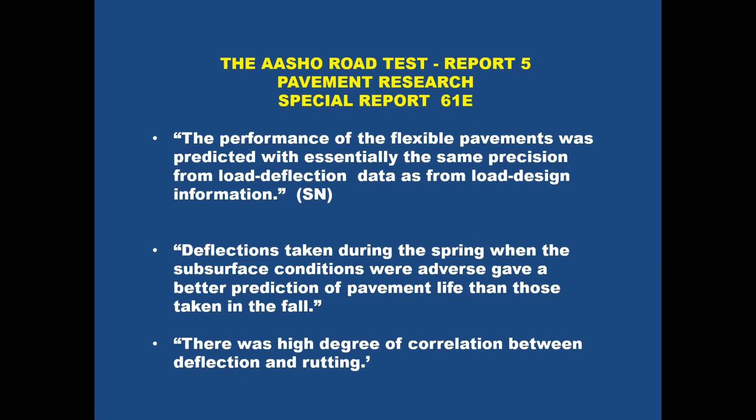Another one showing creep speed deflection versus average rut depth, and as you can see, the R squared was 0.6. It's not the best R squared, but at least it does confirm that there is this relationship.

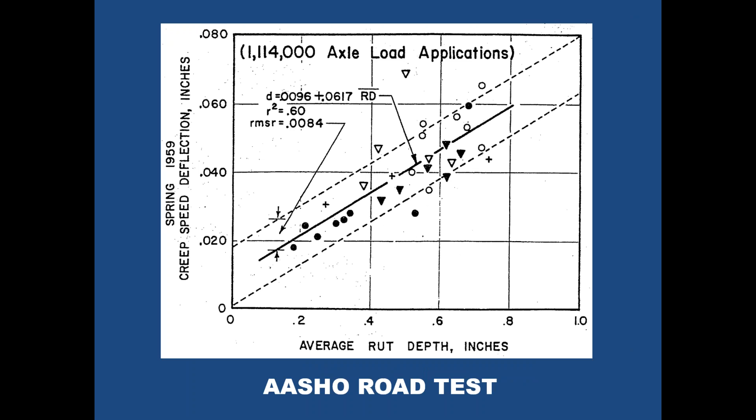Moreland Herrin taught the course. And E.J. and Matt Witczak—most of you would develop a familiarity with Matt through your studies, I'm certain—in 1975 updated that analysis book, The Principles of Pavement Design.

And then the other one, I think, probably has gained a lot of traction over the years: Pavement Analysis and Design by Y.H. Huang, University of Kentucky. His first edition showed up in '93, and he had a revision in 2004.

Some of the early activities in mechanistic empirical design: I would suggest that ME design got kicked off at the first Ann Arbor conference, now known as the International Society of Asphalt Pavements, in 1962.

I attended that meeting, and there was a lot of information at that time coming in from folks in the United Kingdom about ME design, et cetera. So quite a few good articles and papers showed up in the '62 Ann Arbor conference.

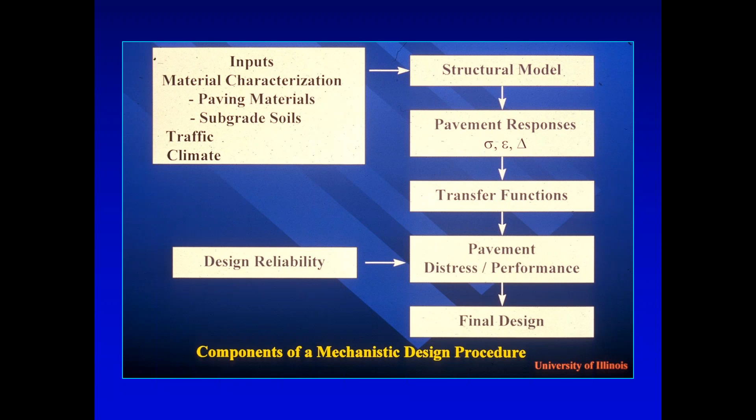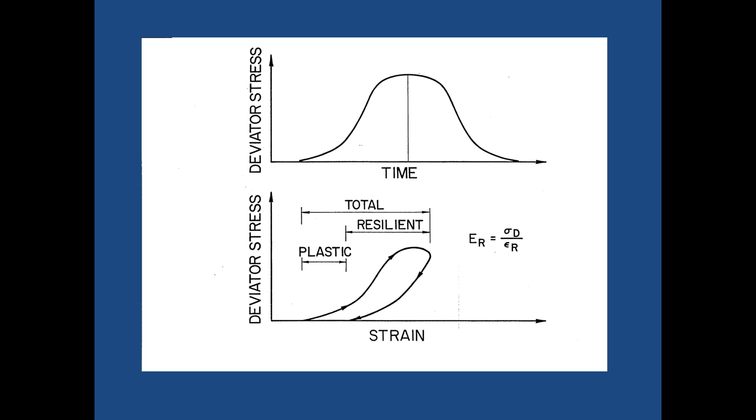If you look at resilient modulus, we have a repeated deviator stress. We measure total strain and recoverable resilient strain, modulus, resilient modulus, repeated deviator divided by the resilient strain. Fine-grained soils are stress softening. The higher the stress state, the lower the modulus. This is a typical one that we developed years ago and used in our work in Illinois for the Illinois DOT, showing the modulus as a function of deviator stress.

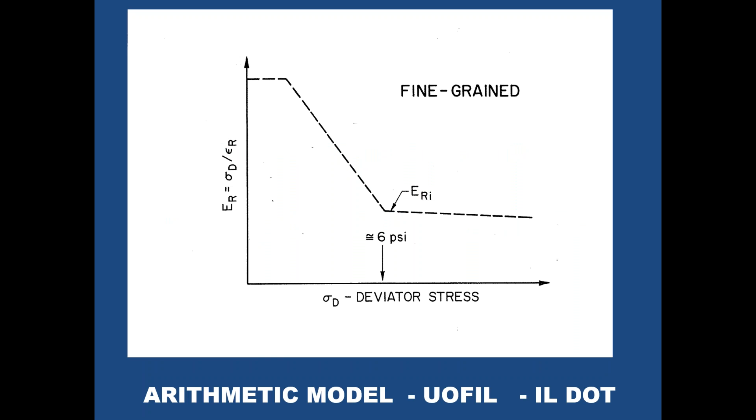Interestingly enough, somewhere around 6 psi, you start finding the effect of stress state drops off considerably. That's not a magic number, but it's a good number. And so beyond 6 psi, you'll find the modulus does not change a whole lot as a function of repeated stress state. In fact, the Asphalt Institute suggests if you're developing an input for their particular approach, pick a modulus based on a repeated deviator of 6 psi.

You can also then look at the effect of various factors such as moisture content. Here we've got a particular soil Ipava that sells for about $14,000 an acre in northwestern Illinois. But at optimum moisture content, a little bit on the dry side, then we're at optimum plus 1.8%, a huge impact. So we have material very sensitive to moisture content.

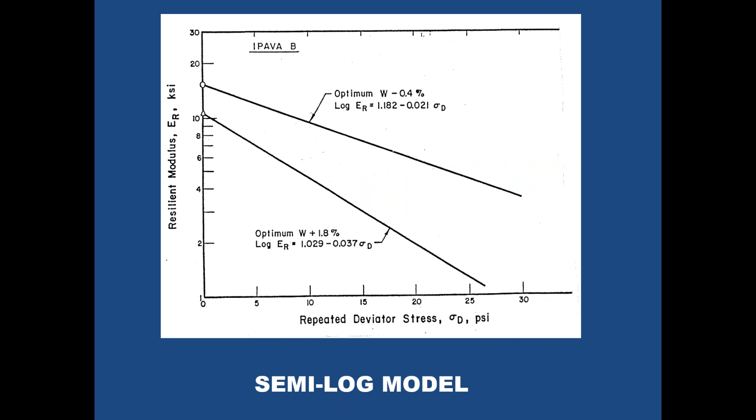There are other ways of representing the stress dependency. For example, the semi-log model is one that's used. We've got that in ILLIPAVE. If you take that same data we showed in the arithmetic plot, show it on this kind of a plot, you'll find once again that you can capture the effect of the stress state on modulus.

The model that's currently employed in the mechanistic empirical design guide is this one. It takes input for theta, the bulk stress, as well as the octahedral shear stress, and from that you can predict the resilient modulus. This particular model has a K2 and a K3, and that kind of complicates things.

Once you get beyond two parameters, I really get concerned as an old farm boy. I like simplified stuff that still captures the major effect. But in the analysis of the LTPP test data from sites all over the country, there was not a very consistent effect of K3. In fact, in some cases, it went the wrong way. So this model is, I would suggest, one that is very sensitive. You need to know from your test data exactly what those values are.

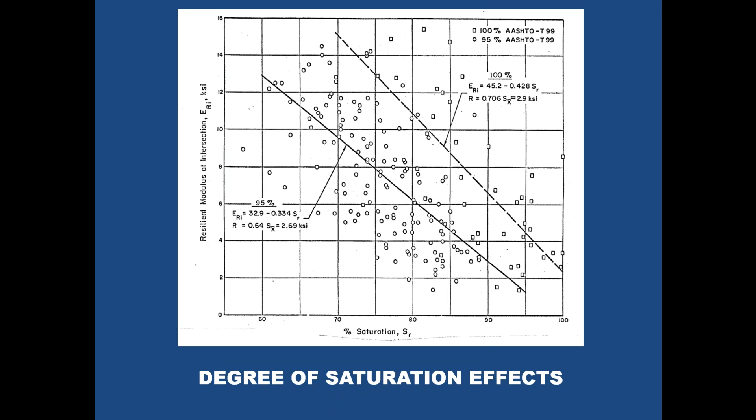Okay, some of the effects we need to consider. Degree of saturation captures the effect of moisture content on modulus. This is not what you would call a real good relationship, but it certainly captures the trend. If they get wetter, particularly on the wet side of optimum moisture content, you're going to lose values on your modulus. Hey, how about a freeze-thaw cycle?

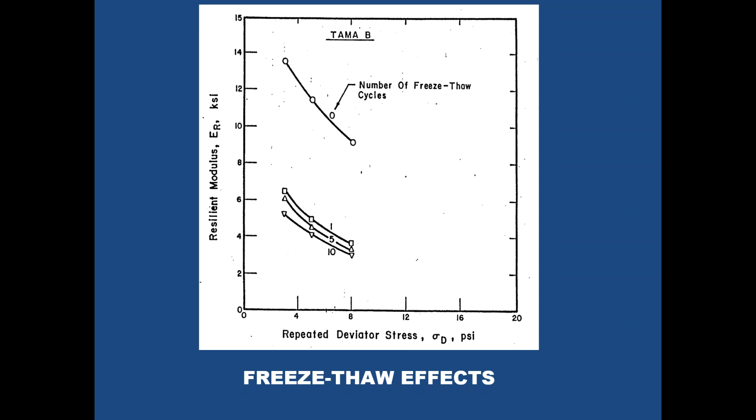There's one thing about this that's even more disconcerting. Notice whether you get 1 freeze-thaw cycle, 5, or 10, you get a considerable reduction. In other words, 1 cycle is enough to trash you out and drop your modulus down to a very low value. And that's not good news for us.

How do we get these modulus values? That ERI value is the modulus at a repeated deviator of about 6 psi. We can actually do the testing. We have found that we can develop that from falling weight deflectometer and back calculation procedures.

And from that, tying into pedology and soil series, you can say, hey, if you've got this particular soil series, you're probably going to have these kind of moduli values with the various layers. Or we can estimate it based on strength, unconfined strength, CBR, dynamic cone penetrometer.

The folks at Purdue years ago developed a real straightforward procedure. They took a static stress strain curve and found they could estimate what was going to be developing in terms of repeated load moduli values for fine-grained soils. I'm surprised that Indiana has not picked up on that, but they haven't. It's an excellent piece of work. I don't know whether Errol includes that in the transportation soils course, the work from Purdue, stress strain, static work.

Yeah, okay. And of course, there's always typical values, right? Yeah. So there are a lot of ways of developing those inputs.

The thing about subgrade moduli, there's no such thing as a fixed value. It changes - moisture content, freeze thaw, etc. And all of a sudden you get a different subgrade modulus value that's going to impact what's going on with the pavement response.

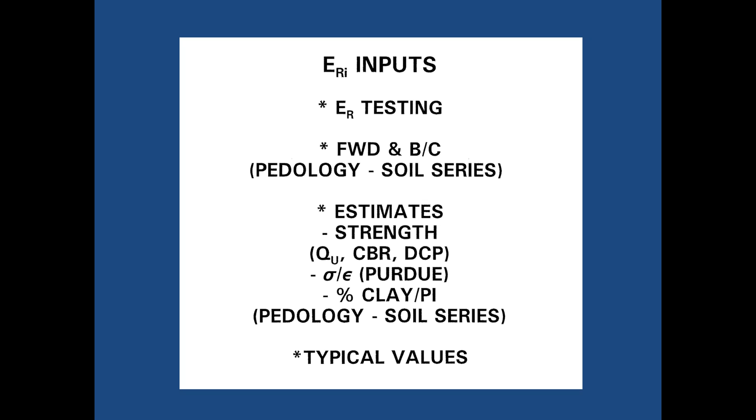Subgrade variability is huge. You do back calculations for 5 miles of pavement, the coefficient of variation might be 50% on the back calculated value of modulus. There's a lot of lab testing variability, from the standpoint that the value you get in the field using back calculation in some models, ELP programs for example, don't match up very well with what you get in the lab. So you've got to bridge that.

We don't have that problem with our particular scheme with ILLIPAVE, where we account for stress dependency. These are the subgrades that we typically use in ILLIPAVE and Illinois DOT: stiff, medium, soft, very soft. We find in most cases we're talking medium and/or weaker grades.

If you're interested in a good summary, Anand Puppala put this together back in 2008, NCHRP Synthesis 382, did a real good job pulling together data and information on how you develop an input value for subgrade modulus. What's the subgrade modulus? It's still an issue for you to ponder and consider.

Granular materials are stress hardening. As stress states go up, they get stiffer, giving a peculiar behavior. The 86 guide picked up on work that Gary Hicks did at California with Carl Monismith for his thesis on resilient modulus testing of granular material. This model, K theta to the K2, was developed, and I still like and use it. I think it captures the major effects, including the impact of the stress state, theta, the bulk stress.

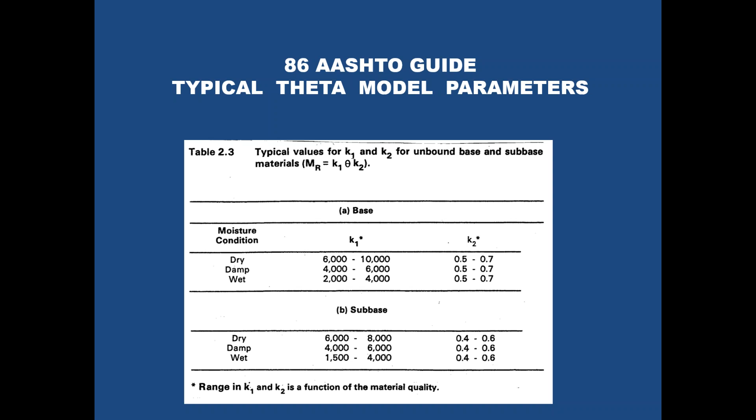This is AASHTO base, AASHTO subbase. They're looking at some suggested interim values that might be appropriate.

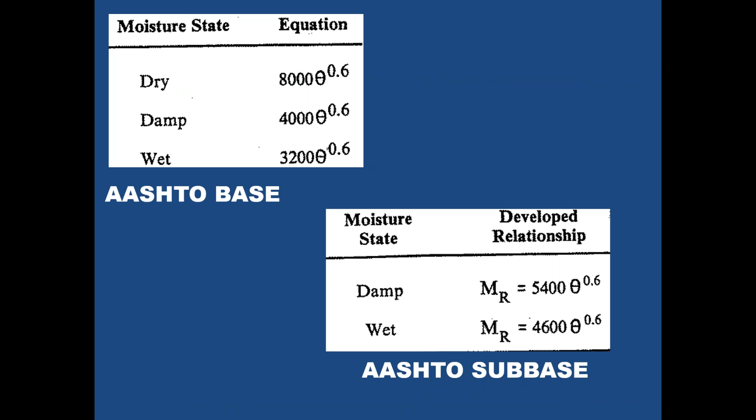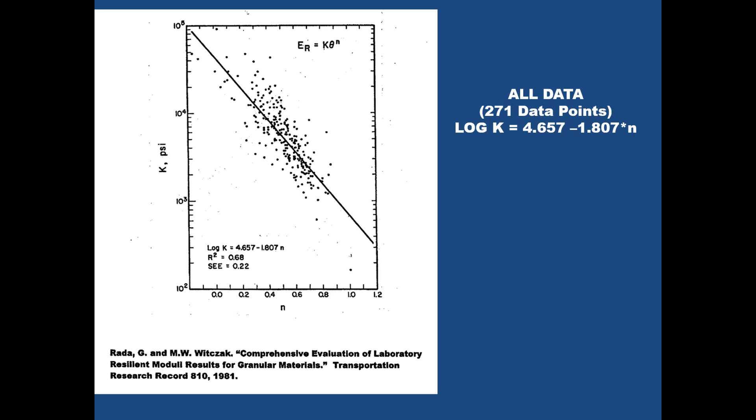This is for all the data. If you look at various types of materials, you'll find an effect between silty sands, which are down here, and crushed stones, etc., plotting up here. But they all have the same general relation: log K is A plus B times N.

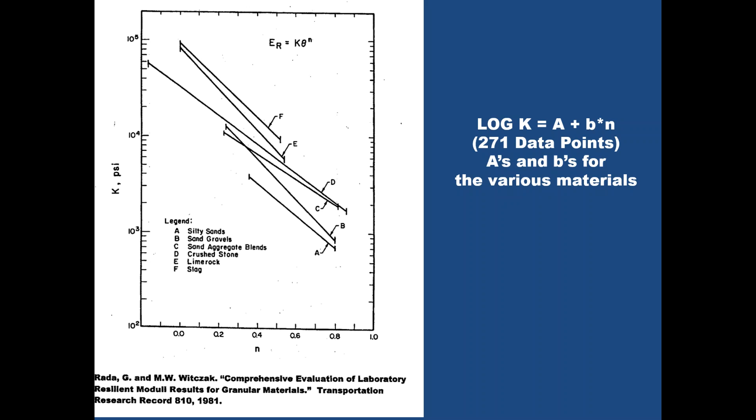So if you get a theta, you know K theta to the N, you can estimate what the modulus would be. Then if you want to do this for subbases, you're back to stress states, theta values that are quite low: 10, 7.5, and 5.

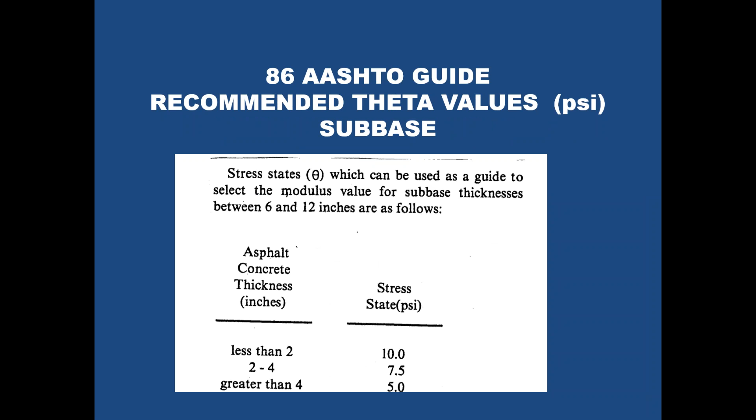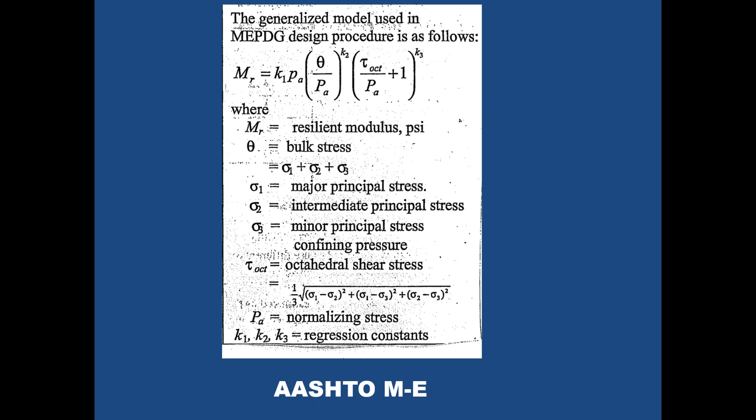This is the generalized model in the MEPDG, the Mechanistic Empirical Design Guide, AASHTO-ME as it's now called. Notice we do have our theta value there, and also this tau octahedral is a calculated value from an elastic layered pavement analysis program. So in this case, you still have to do your materials testing or assume some typical values for K1, K2, and K3 in order to estimate the modulus.

This was in support of the 93 guide, because in that guide they developed a correlation between the coefficient for granular materials, base, subbase, and modulus. What's the modulus? This report was directed toward how do we get a modulus for estimating a coefficient to do thickness design.

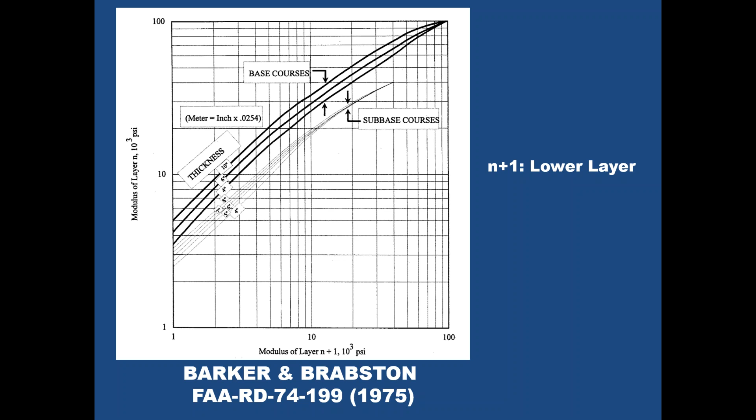The AASHTO, or the Shell Pavement Design Manual, developed some approaches for estimating modulus, once again tying it into the modulus of the underlying layer and the subgrade. So this is their approach. But I think it's leading us the wrong way.

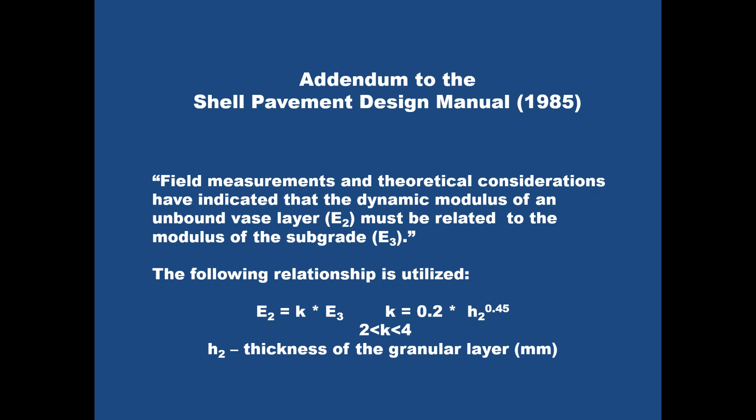What really controls the modulus of the granular material in conventional flexible pavement is the modulus and thickness of the hot mix asphalt layer. What controls the stress state in a granular base? The thickness and the modulus of the hot mix asphalt layer.

This is work I submitted in a discussion at the 5th International Conference at Delft. We looked at various asphalt thicknesses and modulus of the hot mix. That value, a modulus of 9,000 theta to the 0.33, is a reasonable representation of the AASHTO road test base course.

Some work we did, repeated load testing on that. If you plot the granular base modulus as a function of ET cubed, what's the stiffness of a beam? ET cubed, something like that? Pretty close. If you look at log ET cubed over 100, where E is in KSI and T is in inches, and plot that against the granular base modulus based on that previous data, this is what you get.

So we need to factor in the fact that if we have thick surfaces and high modulus surfaces, the modulus developed in granular materials will be quite low.

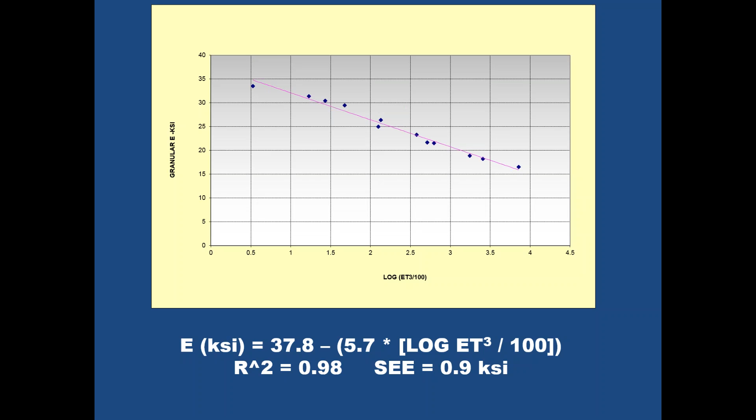We ran some ILLI-PAVE analyses to demonstrate this effect, keeping the modulus consistent at 500 KSI, for 4, 6, and 8 inches of hot mix, with a 10-inch granular base. Notice it's 5,000 theta to 0.5, a ballpark reasonable input for crushed stone, with a friction angle of 45 degrees.

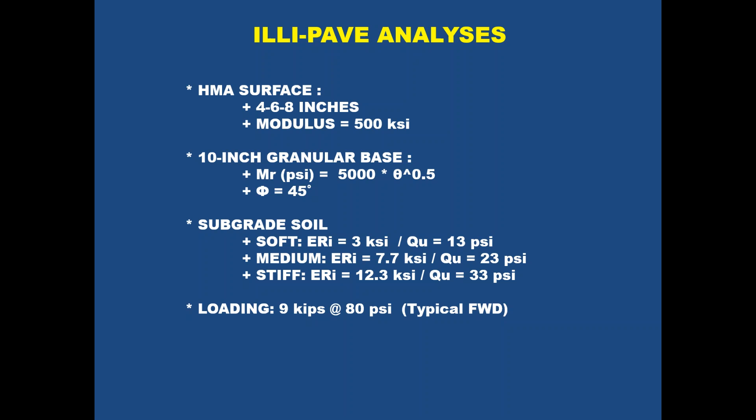So you can see here, if you look at the modulus of the granular base as a function of the thickness of the surface course, the base modulus varies, obviously, to some degree. But this is the midpoint value of the modulus, the average for the 10-inch layer.

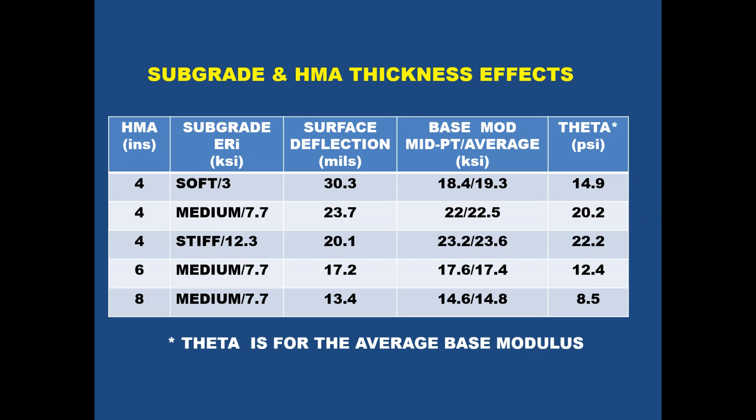What happens as you move horizontally from the loaded area? Do stresses go up or down in the granular material and the subgrade? They go down. If you look at the value of theta we get, that's basically under the load plate.

Then we're at a 9-inch offset, 12 inches, etc. Look at these values you get for theta when you're out there at points remote from the loaded area — you've got modulus values that are almost insignificant. In fact, they may be lower than the subgrade.

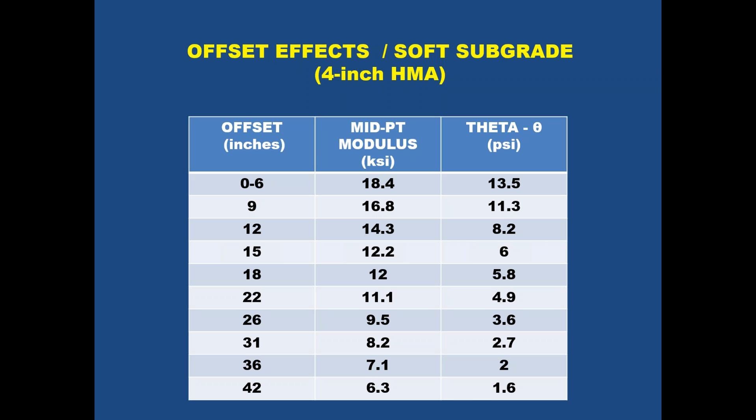When you start looking at this deviator stress calculation, sometimes that gets to be a bit of a challenge. You run an elastic layered program and look at what's going on at the bottom of a granular base — what do you see? Tensile stresses. Have you ever been by a stockpile of crushed stone and picked up a rock? How many rocks come with it? None. What's the tensile strength of granular material? Very low, or nothing. So that's simply suggesting it's not an easy calculation with an elastic layered program.

For HMA modulus, we need to take into account time of loading, temperature, and frequency effects. We have to consider it — there's a lot of information out there on estimating that.

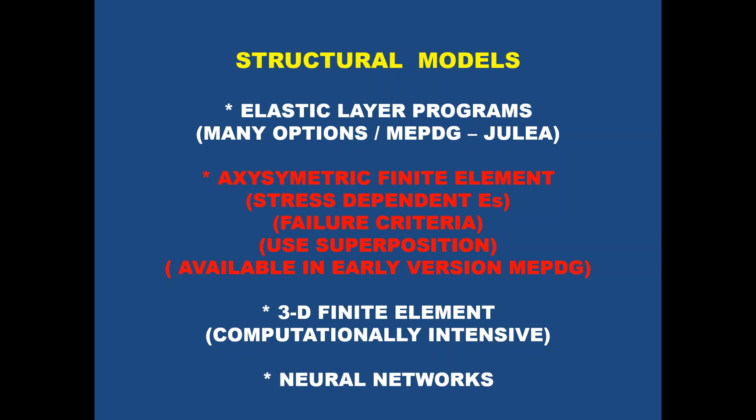Then neural networks. Erol and some of his grad students have done a lot of work. Neural networks are catching on—it captures the effects in a more straightforward way.

We need to also look at some other issues. Anisotropy—Tutumluer, especially, he likes that anisotropy topic—and also residual stresses. They're important factors, but residual stresses in particular are really hard to take into account. I think the anisotropy stuff, they have some schemes that handle that very well. GT PAVE has an anisotropic capability.

Transfer functions—stresses, strains, displacements—how do they relate to performance? Well, performance is a function of distress, rutting, cracking in particular. So we need to have these so-called transfer functions. This is a real important issue, one we continue to wrestle with even today. I'll go through a few of these.

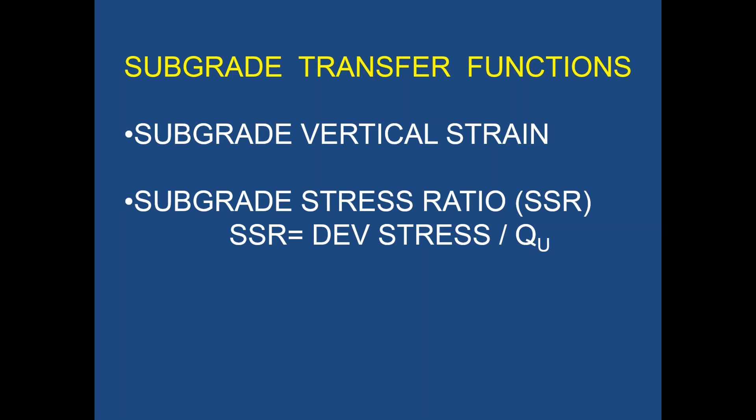Subgrade rutting—there are transfer functions. The early ones are based on subgrade vertical strain. More recently, based on work we've done in Illinois, we found subgrade stress ratio—i.e., subgrade deviator stress divided by unconfined strength—is a much better way of looking at the overall performance of a subgrade. This work has a date of what?

1976. Frank Townsend was the lead on this. I've known Frank for years. I think he's retired—he's wiser than I am. He's retired and isn't working much.

In Pueblo, in order to build a soft subgrade section, all they had was sand. Ernie Selig and I said, hey, we need to have a soft grade. So we got the railroads who were sponsoring the project to haul a lot of Vicksburg buckshot clay down to Pueblo.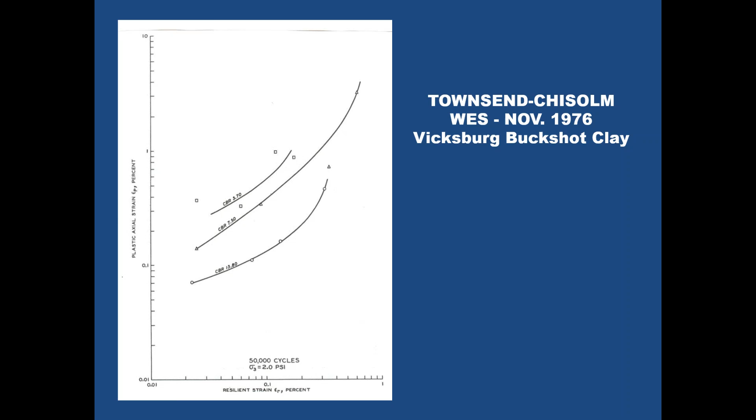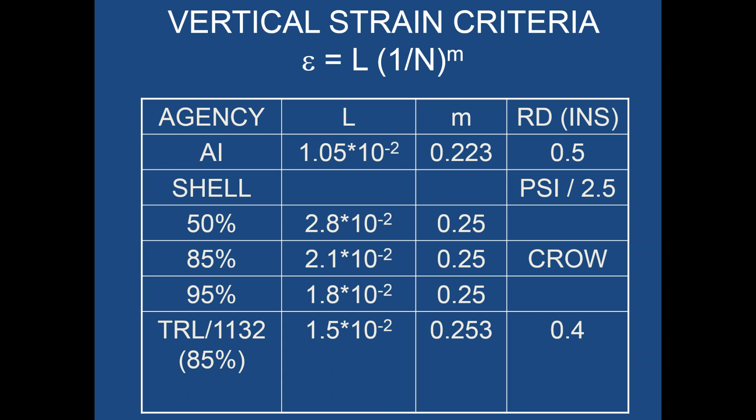Sort of a summary of vertical strain versus design life. What we've got here is the Asphalt Institute shell, that's to a rut depth of 0.5 inches. This is a PSI of 2.5, etc. You can see these M values, the exponent here, stay about the same. The L values bounce around some.

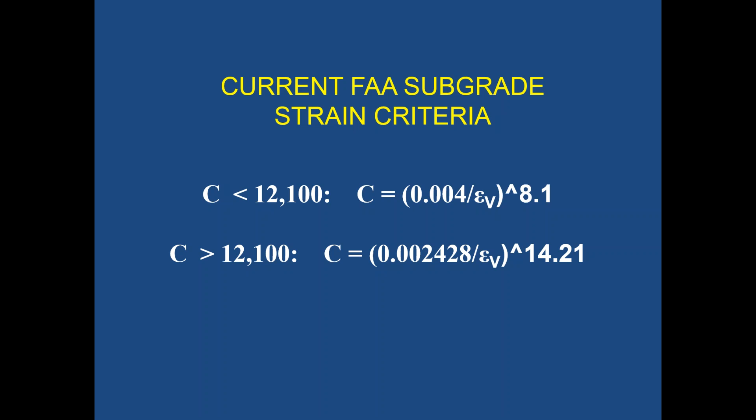Okay, subgrade stress ratio, where we're looking at subgrade deviator stress divided by strength. This is work that Manny Bejarano and I did back in the early 2000s for the FAA Tech Center accelerated loading scheme. We were looking at a bunch of soils, and we found that subgrade stress ratio was obviously related to the development of permanent strain in a subgrade.

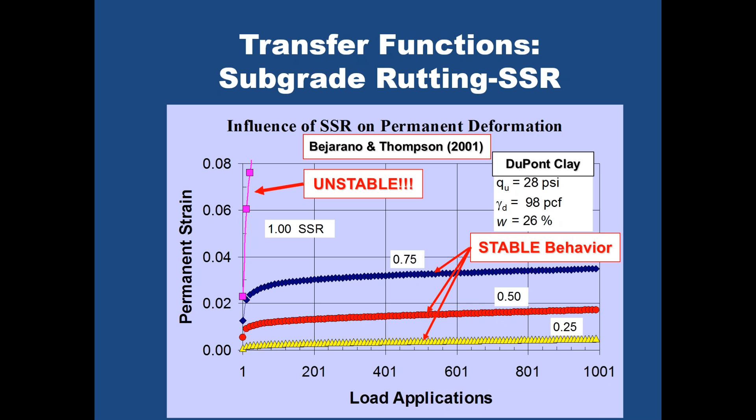As you can see, this is lab data. We've got the DuPont clay here in this case. If you're at low stress states, you don't get much strain. If you go to 0.5, you get some; 0.75, more. Obviously, if you're loaded to 100% of its strength, you're going to get a considerable amount of permanent deformation. That one obviously is unstable.

This is another one, different soil. The same sort of thing shows up: if you have increased stress states, regardless of the moisture content, you still have increased permanent deformation. So subgrade stress ratio is valid. We find it works very well.

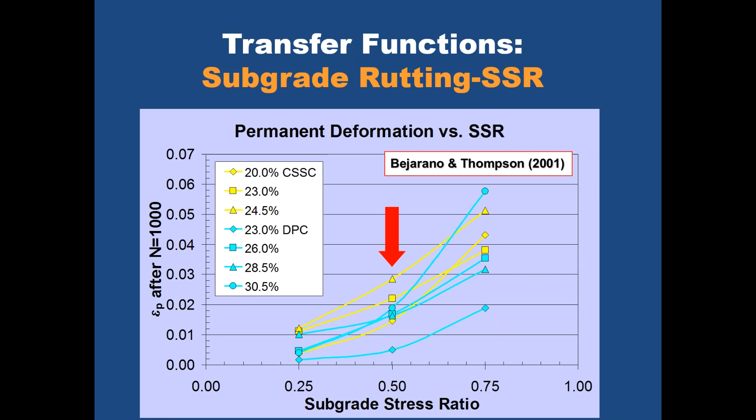These are some early ideas. Franco Gomez and I proposed these for a meeting in Portugal with ISAP many years ago. You can see for values of 0.5, 0.6, you're going to last a long time. You move up to 0.75 or so, you'll have a more limited life.

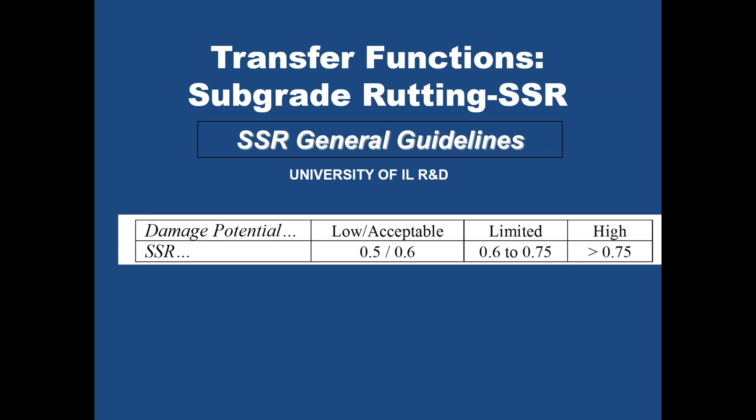For those of you who have worked with CBR-based design for airfield pavements, you'll find that CBR is, quote, a magic procedure for evaluating subgrade soils in the Department of Defense for many, many years. Well, it still is, although not to the extent it was. If you divide unconfined compressive strength by 4.5, you'll get a value of CBR. So we have a connection we can develop between CBR and QU.

If you look at the work that Walt Barker did at Waterways Experiment Station in conjunction with Carlos Gonzalez, they developed a value called beta, okay? Beta is 3.14 — what's that look like? Pi? Something like pi? Times the subgrade vertical stress divided by the CBR. That's beta, okay, that's a beta term.

And they found, based on their analysis of a huge amount of performance data they had accumulated from their test tracks and other locations, that log beta was related to C. C is what? Coverages. Coverage is a magic approach that the Corps uses to translate mixed traffic back into, quote, a value called coverage. So it takes into account the wander.

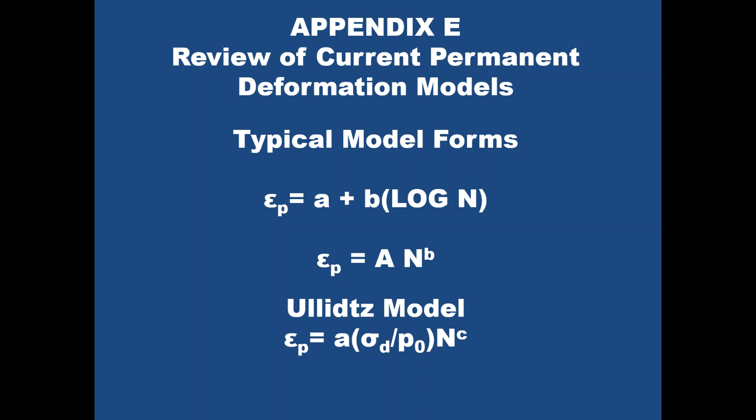Appendix E of that particular synthesis, we have a couple of forms for permanent strain predictions, A plus B log N or A n to the B, and then the Ullidtz model, which includes a deviator stress term as well as a number of load reps term.

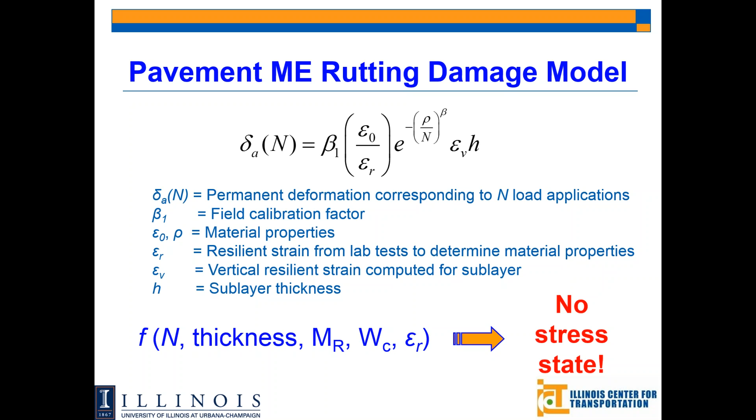No stress term. This is, once again, a little summary of some of Erol's work. Here is the particular rutting model again. Notice here we're emphasizing the effect, no stress state. I don't think you can predict permanent deformation without taking into account stress.

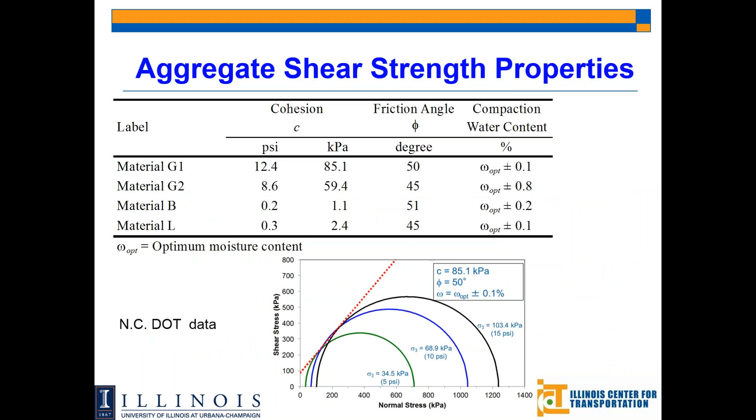This is a summary of some of the work, early work he did for North Carolina DOT, a range of values. They did shear strength testing, characterized materials, as well as modulus testing. Now here's the factor that you really need to keep in mind: shear stress ratio. Stress ratio is a most important parameter when you start predicting permanent deformation of granular materials.

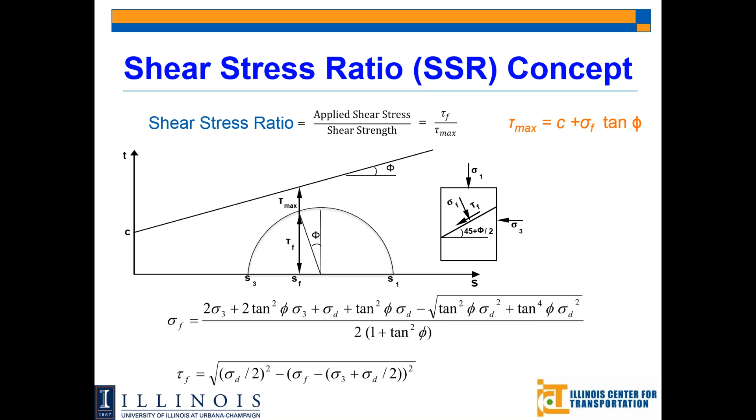And we can measure shear strength. We've done it for years, we still do it, it works quite well. So that shear stress ratio is important. There's some of the work, information from Erol's study. And then you go to repeated load triax - that's his.

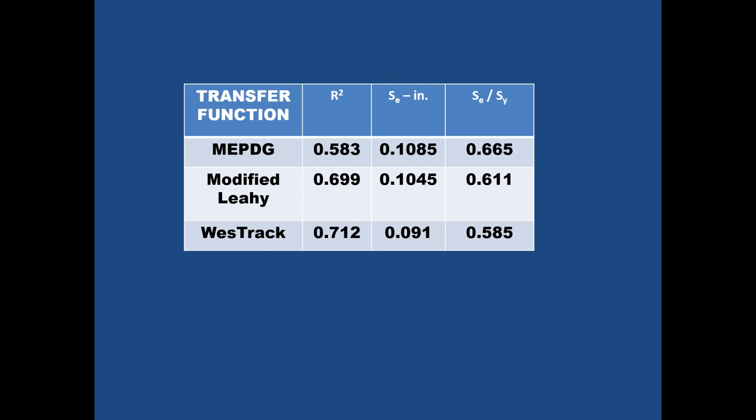The standard errors, as you can see, are all about 1/10 of an inch, the S sub E over S sub Y term, but they all turned out to be about the same. And basically they say, look, if you reasonably calibrate these models, they'll work. Calibration is not an easy thing or a cheap thing to do.

So what's a reasonable prediction for a rut depth? If you're looking at a design of an interstate, failure is about 4/10 of an inch, primary route 1/2 an inch, others, local roads and streets, maybe 6/10. These are values picked out of the MEPDG design criteria.

How do you do HMA rutting? Material selection - do good aggregates work, do good mixed design work, pick the right asphalt, and do good construction quality control and assurance. You'll get a rut resistant mix.

Rather than trying to predict values within 1/10 of an inch or so - how much is 1/10 of an inch, folks? Heck, you can hardly measure it, right? So if you put your effort into mixed design, material selection, and construction, you get rut resistant pavements, and that's what we're after. But I'm not saying don't pursue trying to predict rutting, we can still build rut resistant hot mix asphalt mixture.

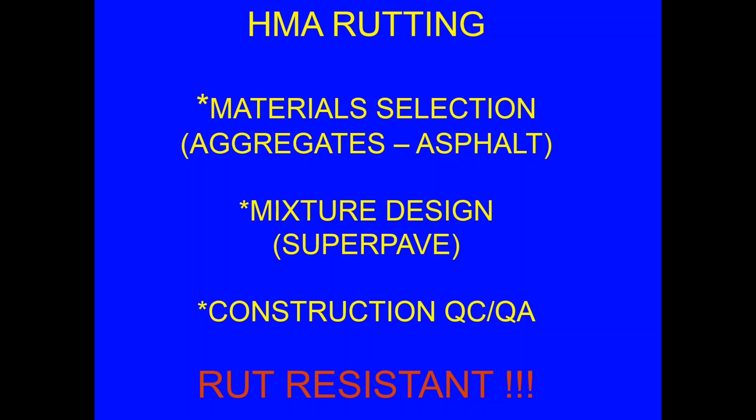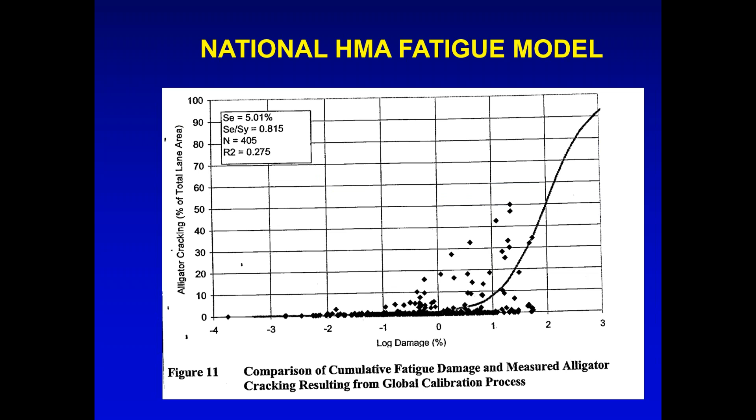HMA fatigue - this is the calibration from the MEPDG. Once again, notice S sub E over S sub Y for predicting alligator cracking. That's not a very good model.

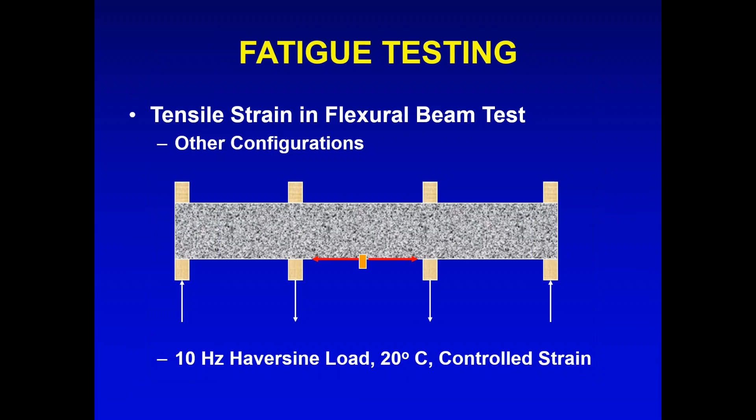AASHTO type testing, beam testing, here we go. We've got these devices in the lab, a lot of work. Tensile strain - if you look at modulus, stiffness of the beam as a function of load reps, we lose modulus as a function of load reps. Ultimately you get down to where you get failure. Failure is typically defined as 50% of the original value, something like that.

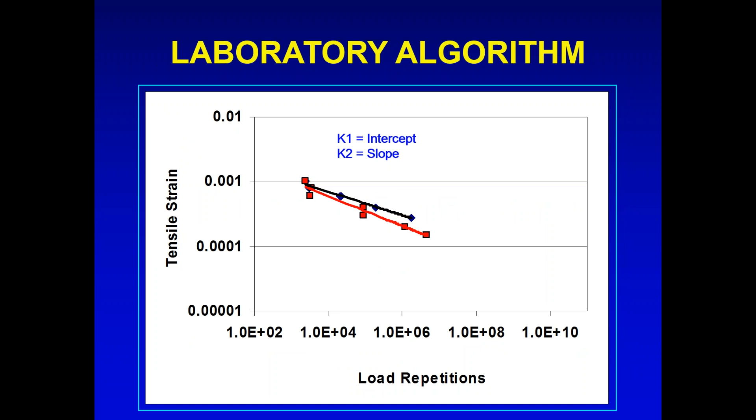If you do a log-log plot of strain versus life, you get K1 over strain to the K2, or K1 and K2, that's the intercept, that's the slope. You plot the data like this, extrapolate it, and you get an increased K2. What does it do? It flattens the curve out. So keep in mind that if you go to a large K2, this thing almost becomes flat.

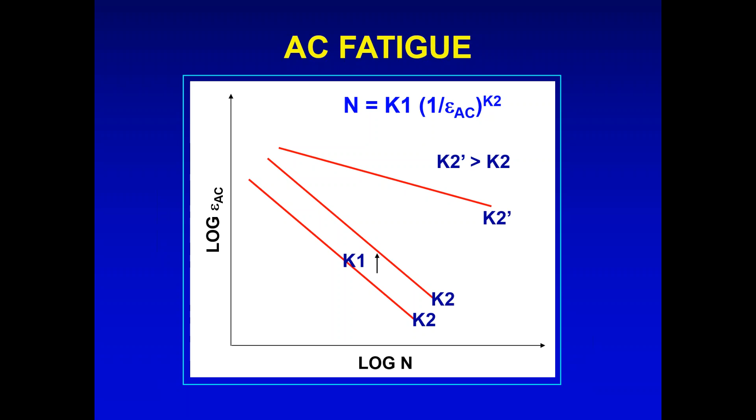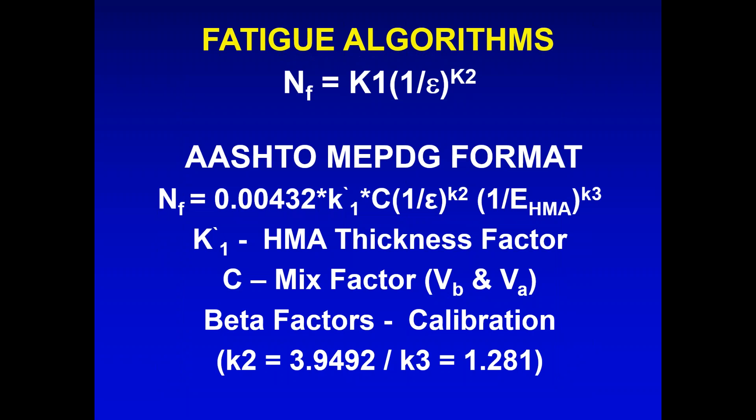It has an effect, but the major driving factor is the strain term. That value basically dominates the fatigue of hot mix asphalt. Some work Sam Carpenter did years ago on fatigue in mixes in Illinois: in K1 over strain to the K2, the minimum K2 was 3.5, the 90th percentile value was 4, which is a pretty good value, and the average was 4.5.

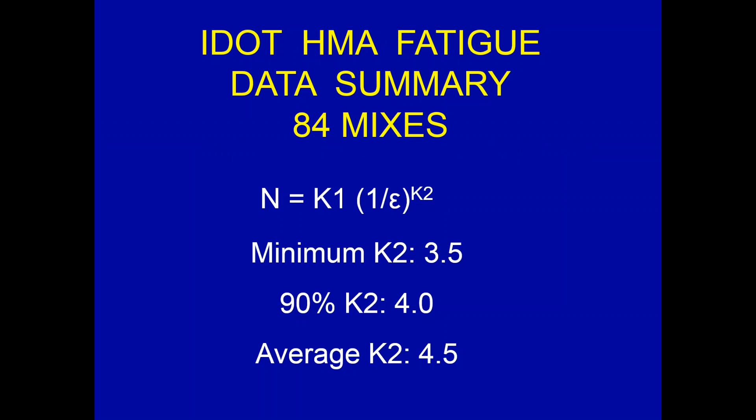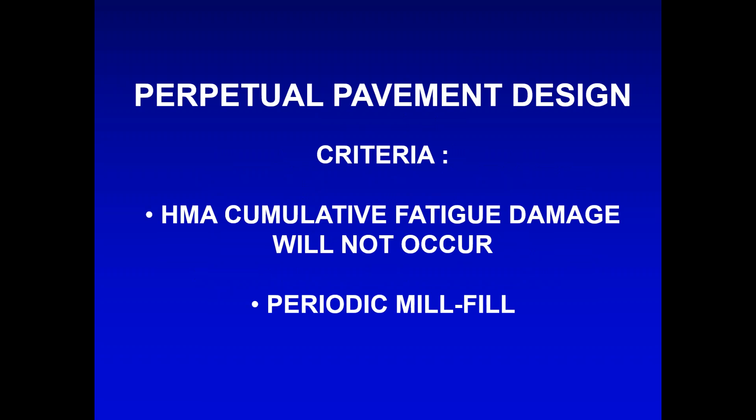Remaining life, how long do we have left in an old pavement section that we're rehabbing? That is a major issue that continues to be worked out. Fatigue endurance limit is that particular value of strain below which we don't get any damage. If that's controlling in a perpetual pavement design, we just periodically mill and fill the surface and we're home free.

Carl Monismith and a guy from Canada named McLean, back in '72, came up with this particular paper. They were suggesting 70 microstrain as a magic value. Okay, this is some work Sam did.

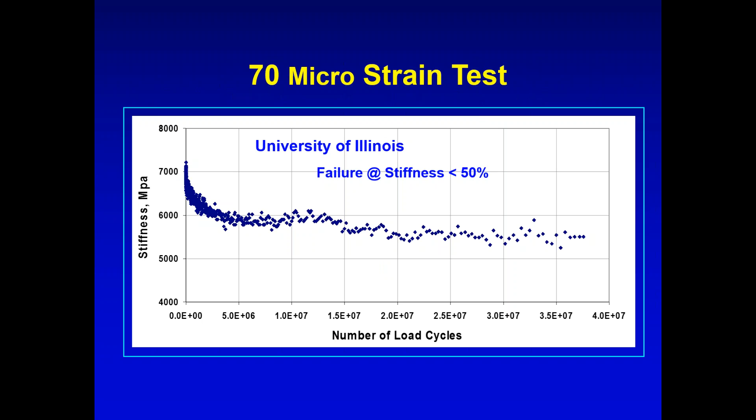Notice here, we're out here, yeah, what's that? That's 35 million, he's out there close to 40 million reps. And this particular mix went all the way at 70 microstrain. That's a lot of popping it, 40-some million. The fatigue endurance limit is out there.

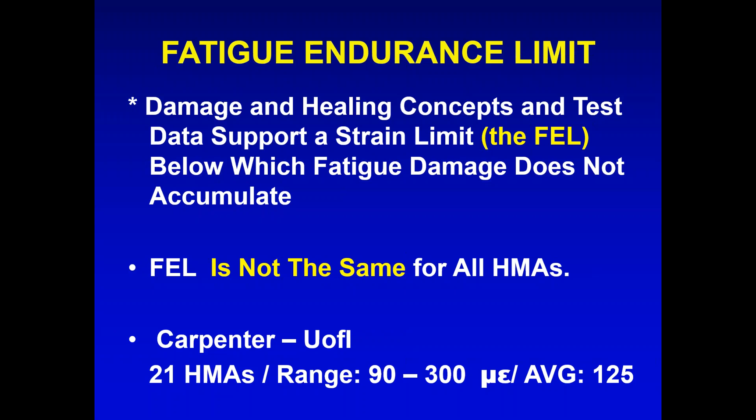It's not the same for all mixes. Sam did a lot of work trying to characterize this. He worked with 21 different mixes. The fatigue endurance limit, FEL, ranged from 90 to 300 microstrain, and the average was 125. Mike Nunn, in 1997, the UK guy from TRL.

Mike first popped up this idea of these long-life pavements. And then we have the group, the Asphalt Pavement Alliance, basically NAPA and the Asphalt Institute getting together, and they were proposing this bit of perpetual pavements that last forever in fatigue, just restore the surface.

Mike Nunn and his colleagues at TRL put together this particular report, which is excellent. I suggest you get it if you don't have it. It goes into their experiences developing the concept of long-life pavements.

Sam Carpenter and I did a dog and pony show at Auburn. This is the ISAP Symposium on Design and Construction of Long Lasting Pavements. We pulled together Sam's work and some of the work we've been doing on the layered elastic pavement analysis. This is basically what you're suggesting: if we get a strain value of 70 microstrain or less, it's perpetual, no fatigue failure.

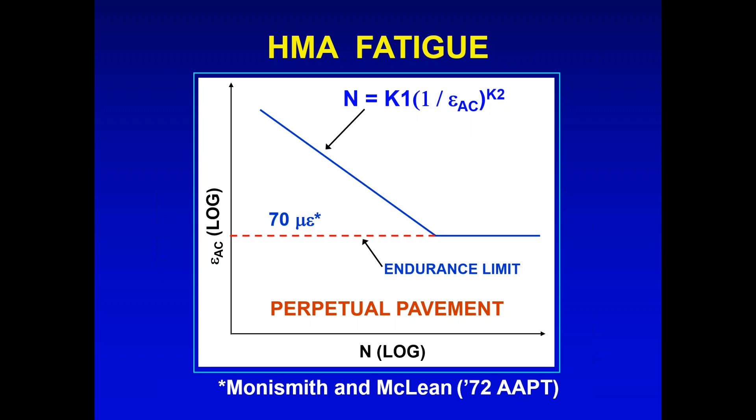The problem is, what's the fatigue endurance limit, right? What's K1 and K2? Current NCHRP research on the problem, that project has been finished at NCAT at Auburn University. Sam Carpenter participated in that, by the way. Then there was a plan developed for pursuing the fatigue endurance limit issue, and that resulted in NCHRP 9-44A. Matt Witczak moved to Arizona State, and so Matt Witczak and Mike Mamlouk ran that project.

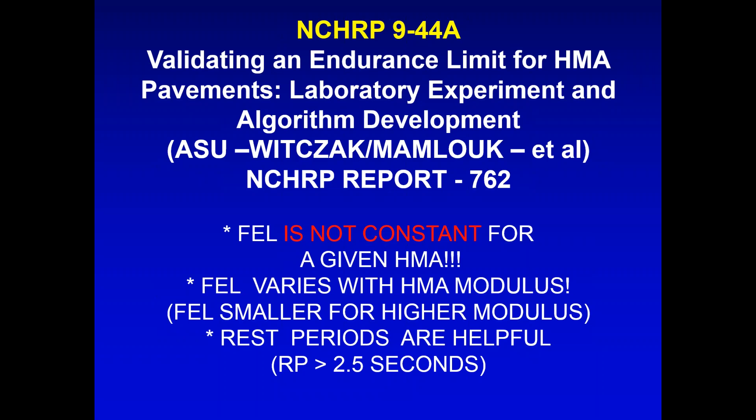Here's what they found: the fatigue endurance limit is not constant for a given HMA, okay? No such thing as a given value. It varies with modulus. You get a smaller fatigue endurance limit for high modulus materials. Throw in a rest period, in other words, instead of going bump, bump, bump, bump, provide a little rest between load reps, and you'll find that the fatigue life increases. This shows that effect.

I ran this particular procedure proposed for a section here in Illinois, a 10-inch full depth pavement, with various moduli values. If you have a 1 second rest period, that's the fatigue endurance limit in microstrain. With a 5 second rest period, this is what you get. Considerable difference, a factor of 3 or so. That's of some significance.

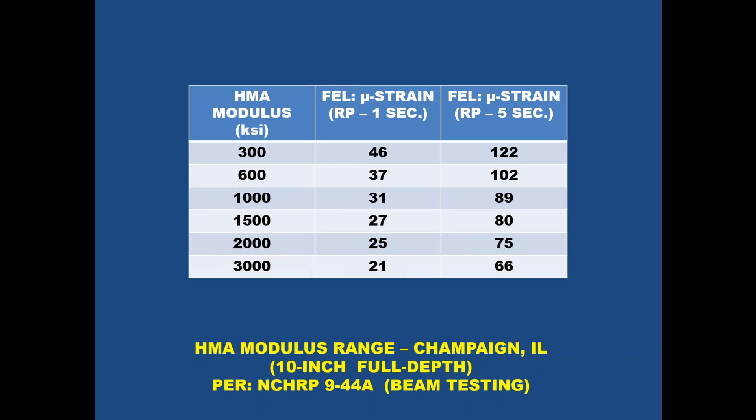There is a current project underway with Ray Bonaquist and Don Christensen at Advanced Asphalt Technology for completion in 2017: binder fatigue, fracture, and healing, and their contribution to hot mix asphalt fatigue performance. We're anxiously awaiting their inputs.

Our perspective on perpetual pavements in Illinois is this: we look at the hottest month of the year, which is July. We predict the modulus for that month and ask what's the strain value for that particular temperature. We compare it to our criteria. In Illinois, we picked 70 microstrain. That's a very conservative value, by the way, but that's the way we do it. Design reliability: are we working with average values? We try to work with 90th percentile values, etc.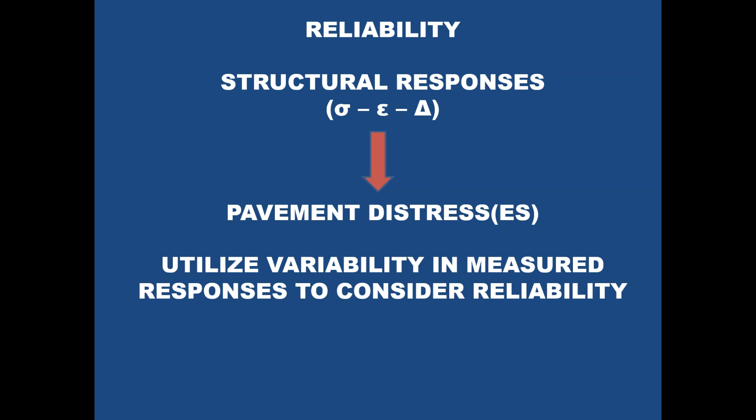What can you measure about a pavement? Structural response in terms of deflection. We're interested in stresses, strains, and deflection. Of those, deflection is the one we can easily measure, and we can do it with a falling weight deflectometer, a rolling wheel deflectometer, or a traveling speed deflectometer. We look at the variability in those deflections and relate that to performance.

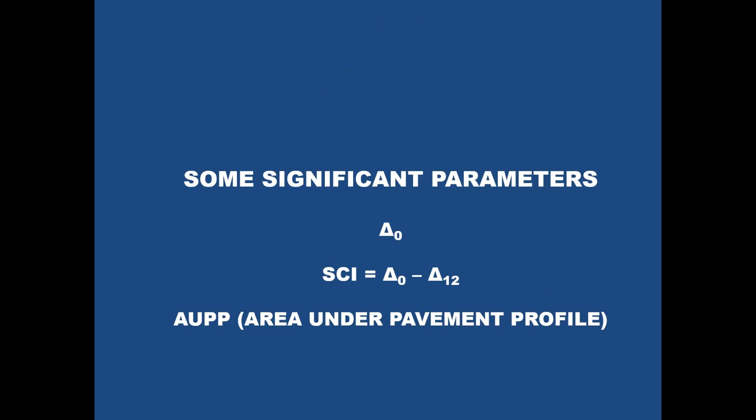The SCI, Surface Curvature Index, is the deflection at the center of the load plate minus the deflection at a 12-inch offset, though this is a preferred value. It's one Howard Hill and I developed many years ago called AUPP. Basically it takes out the effect of the subgrade and looks at the overall behavior of the hot mix section.

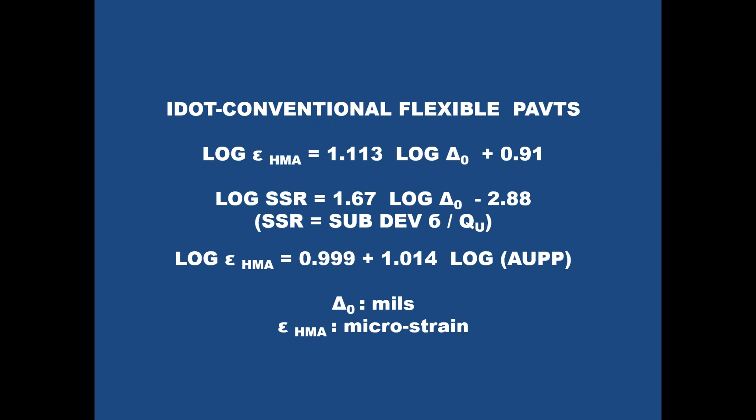Conventional flexible pavement, same thing: strain in the asphalt, stress ratios, strain as a function of AUPP. Once again, you can measure these displacements under FWD loading, TSD, or RWD loading.

Okay, observations and a summary. We've come a long way in the last 60 years, and we're getting better all the time. Notice we're not consistently satisfactory - that's a nice way of saying we suck at doing some of this stuff, okay? Got to be politically correct here, right? Nevertheless, calibration does improve things, and we continue to try and calibrate.

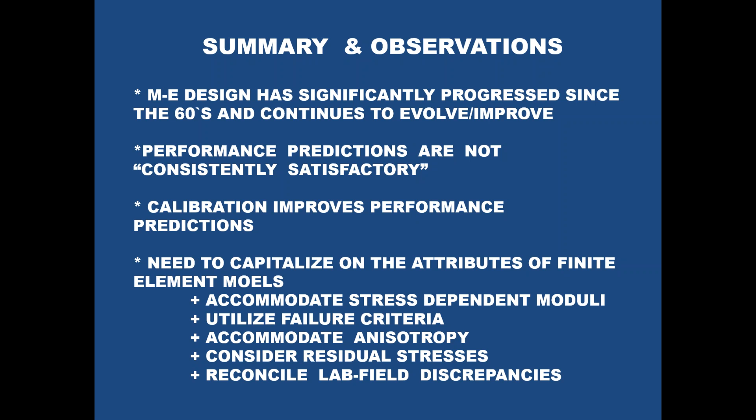However, we need to go to finite element models. We need to accommodate stress dependency. We need a failure criteria, the idea of anisotropy, residual stresses. We need to reconcile lab and field. Whenever you do a lab test and get a number, you do a field test to back-calculate a modulus and you're off by a factor of 2, you say, wow, we must have a problem here.

We need to continue to refine our characterization procedures for modulus, strength, failure criteria, and fatigue, and improve transfer functions. Let me pick a transfer function - I can get you any pavement section you'd like to build. No problem. It may not work, but if your transfer function is appropriate, okay.

We need cumulative damage models that are better, with stress history effects. We need to have reasonable expectations, folks. We're working with materials that are in the ground somewhere in the world. The asphalt comes from somewhere, it shows up in our project and we take it and use it. So trying to predict some of these things within 15 load reps or 5/100ths of an inch permanent deformation may be somewhat unrealistic. However, we are progressing.

Keep up the good work. I've done my part. It's all up to you folks down here. So pick up the flag and charge ahead, okay?

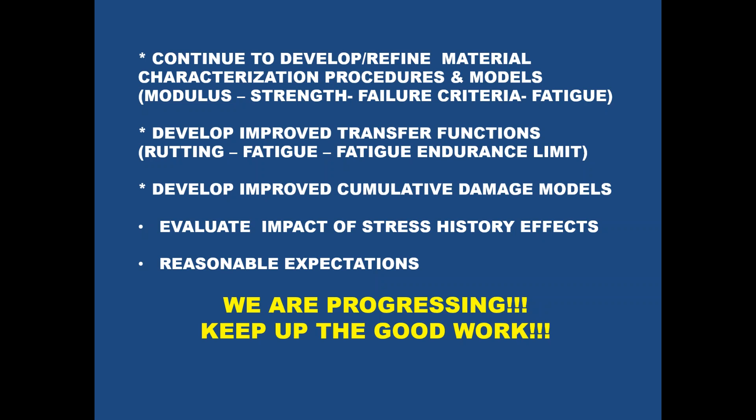Okay, thank you very much. Enjoyed it. And if you have any questions, we'd be glad to respond to those.

Any questions? Don't feel that I'm overpowering. I don't bite or anything like that.

So, a lot of material, but it's a challenging issue—an issue of most importance. I'd suggest now that a lot of our emphasis needs to move toward sustainability, in-place recycling, this sort of thing. As you move into those kinds of materials, folks, we're going to hit even bigger issues than some of the problems we've been discussing here today.

Okay, virgin materials—hey, I like it. Virgin materials, wide open construction, new stuff—oh, that's great, but we're not doing a lot of that. A lot of our money at IDOT and other DOTs nationally is going into rehab, rehabilitation, et cetera. And those problems are very difficult to handle.